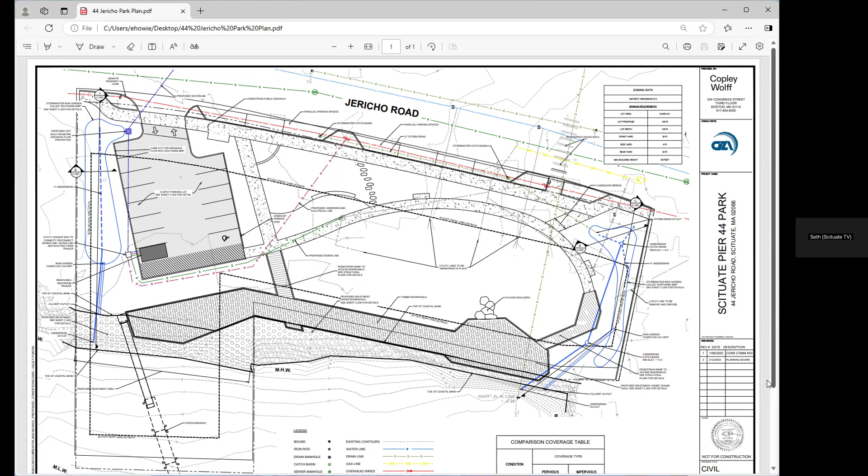Perfect. So I can walk you through this plan document, and if you want to see some three-dimensional images of the shade structure at the point that it is, we can bring that up too. But it is an open air structure, just so you know. It's the light tan view.

As you look through the site, you'll be able to look right below and right through the pavilion out to the waterfront. That's the intent—the water, wind, everything else will flow right through it. There are no obstructions. There are a couple screens, but they match the requirement that precludes the need for them to be breakaway, so they're open enough to allow water to flow through.

So the Ryan described the two rain gardens. They basically are the shoulders of the park. Those are the low points that collect runoff and direct it back toward the harbor. It also provides a nice vegetative buffer to the neighbor on the left, and a good buffer for the park looking into the parking lot at the marina.

Along the road itself, there's a series of slight mounds with all indigenous planting. The sidewalk that currently exists along Jericho Road has been moved into the site to allow 7 parking spaces along Jericho Road.

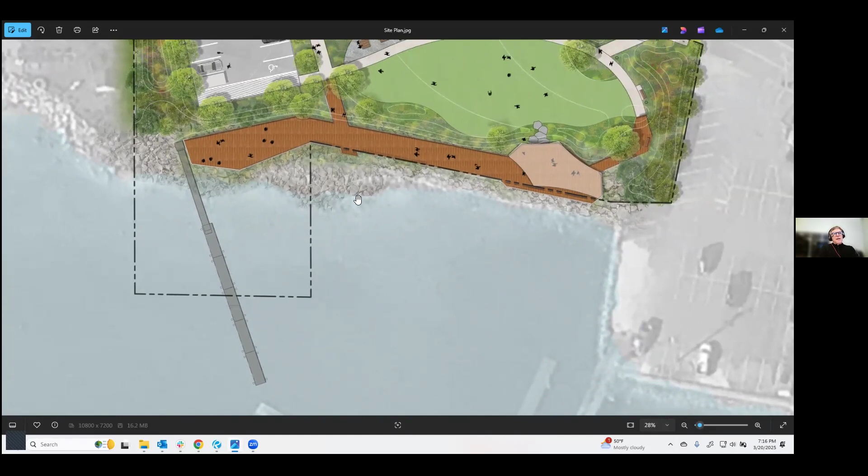You can see the boat launch for kayaks, canoes, and sailboards, etc. It's been located further away from the neighbor's property and angled as well to prevent any kind of conflict with the neighbor there.

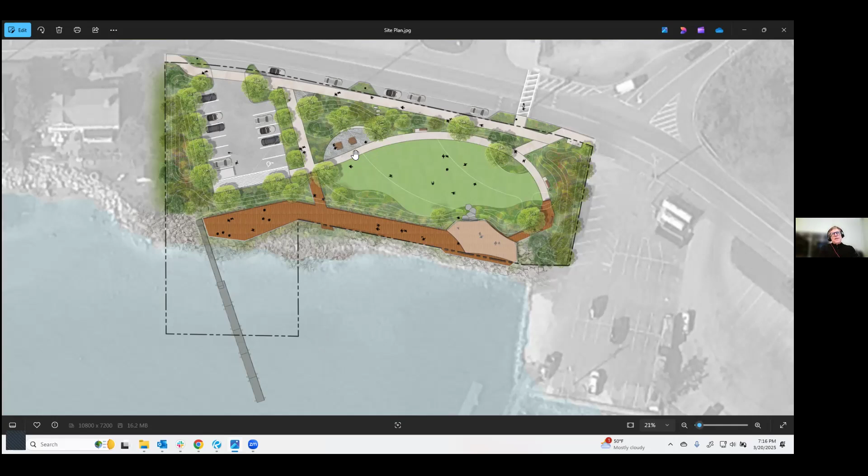It's exclusively a passive park. You can see there are some opportunities for permeable pavement for picnic tables and through there, but a lot of it will be spontaneous and take place on the lawn. It's 100% accessible without ramps, just some sloped walkways getting up to the promenade deck and the shade structure.

So this gives you a pretty good idea, I think, of what's planted and what's not. If you have any direct questions specific about this, we can get through it.

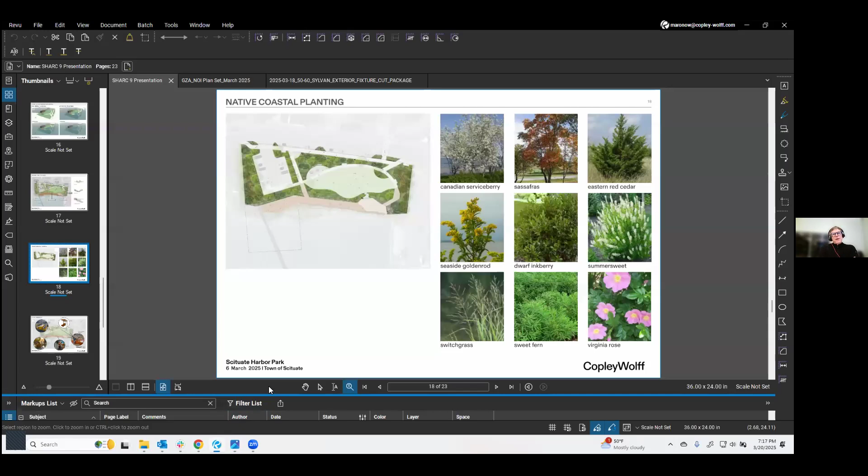I had a quick question: the covering for the shaded area, what's the material for the covering? I was reading it was steel and plastic—could it be canvas, or different materials? No, it's going to be a full roof structure, timber and steel. The architect's not on board yet, so I can't be exactly specific about the materials, but it's going to be a real roof structure, not a tent or fabric.

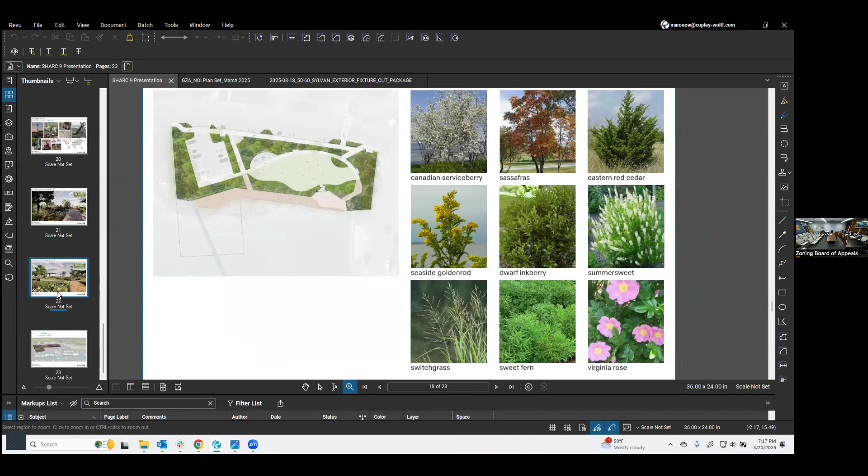Okay. And other than the picnic area, are there any benches, or is there a plan for any benches along the boardwalk or closer to the water?

If you can zoom in a little bit, Madison, you can see there's going to be picnic tables in that area, and some individual benches along the way. We haven't submitted the 90% design yet, but we have permanent furniture picked out that could be bolted to the deck itself.

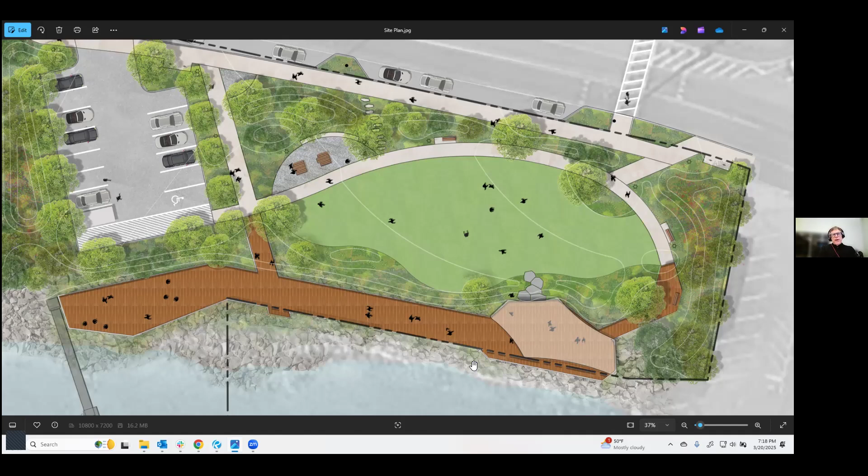That obviously has to go through a double level of approval. But it's meant that the deck is a destination, sort of a midpoint for the harbor walk, where people might come over early in the morning to see the sunrise and just enjoy the view. So we'll have some very durable furniture bolted to the deck.

I'd add that the boardwalk, the portion on the left of the screen, is angled right at the lighthouse, so it's going to be a beautiful space.

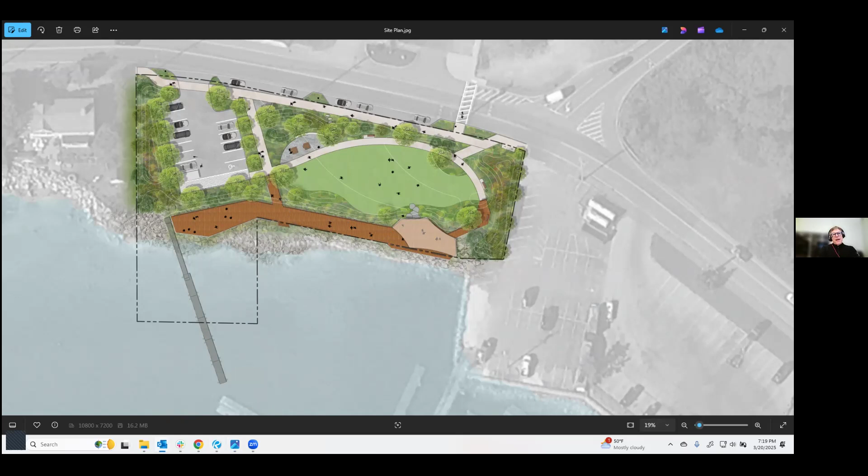It's meant that the lighthouse and this park talk to one another, and we will have some very light lighting for the rails and such. The lighthouse will have its light, and this park will have its version of light, but it's not meant to spill up into the atmosphere. It's really meant to mark the architecture, so these two landmarks can talk to one another.

Board members, questions, comments, inquiries? I do not have any. I have nothing zoning related.

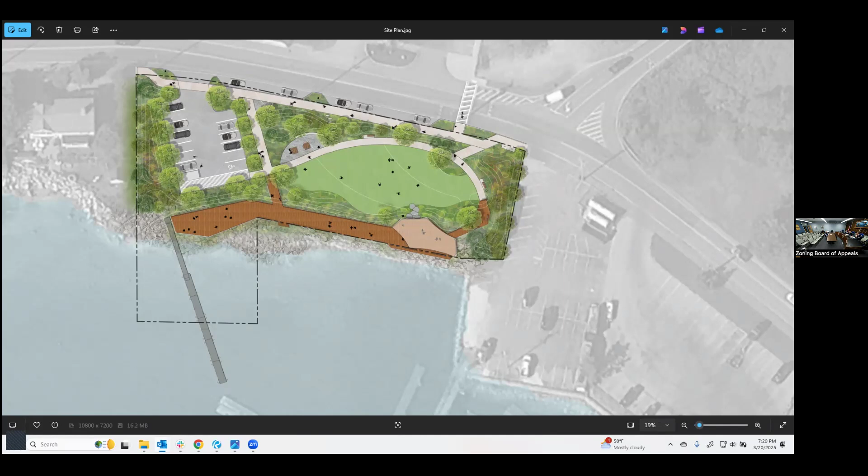And are you folks asking for us to approve this plan, or are you just asking for our approval for the construction of a new municipal park at this location? I'm just curious because there was some commentary that this might change slightly. I don't know that those changes would impact this plan, but I'm asking the question from a more procedural standpoint—are we at the right stage? They're still going to ConCom, right? There's another ConCom meeting. Are there going to be further changes?

I think, obviously this doesn't happen very often, but it seems to me—and again, the board has the judgment and final call on this—that you could issue a finding and/or special permit for the park in general, and small changes along the way wouldn't affect that permit. I don't see why they should. The regulations are pretty clear that the municipal park is one of the allowed uses with a special permit.

Absolutely, and beyond that, I'm not sure a further detailed description is necessary. This is certainly a municipal park. I agree, and that's what I was going to say. And the structure itself will be governed under the building code, not anything to do with zoning. Correct.

So we won't be getting involved with that. I don't think we have to worry about setbacks or anything like that. The structure is an open-air structure, and the parking lot is where it's going to be. You could make the argument that you'd measure to a drip line, but I don't think it matters. I'm not particularly concerned.

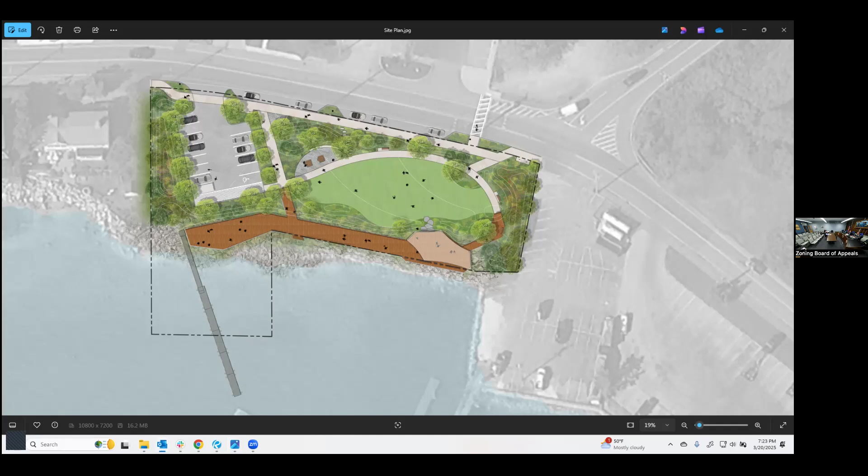Again, I want to acknowledge all the great work of Corey, Copley Wolf, and GZA—they're really phenomenal. I agree, on the record, a lot of work has gone into this. Obviously this has been an ongoing discussion within the town about the best use for this property. I think everybody involved has been incredibly thoughtful and focused on creating something beautiful for the town, and this is shaping up to be a terrific addition. So, thank you. Thank you very much.